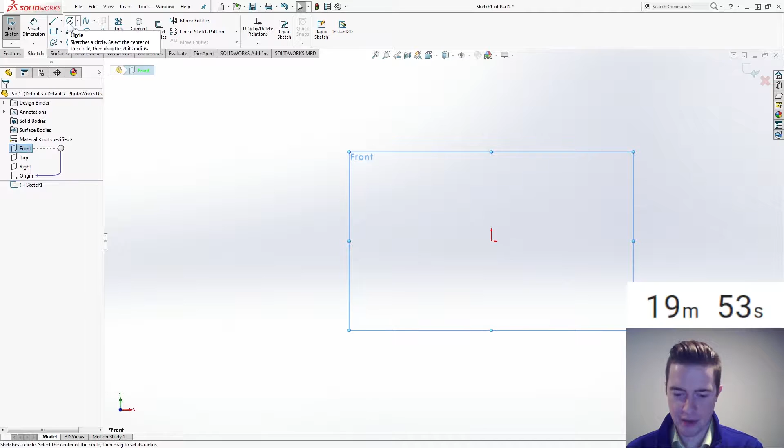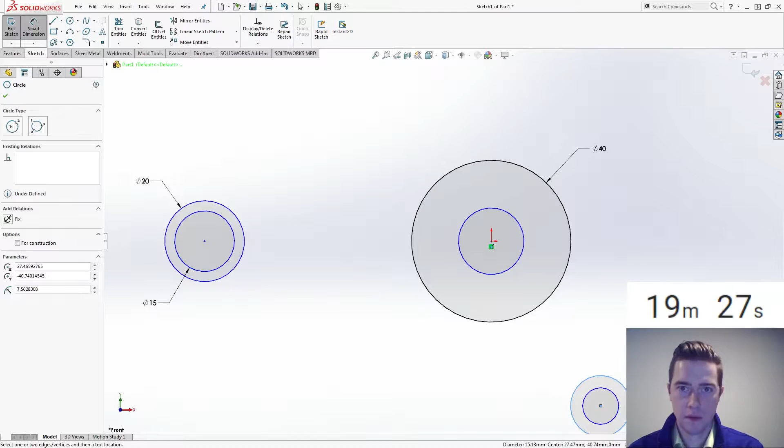So I don't know where I want my origin to be. It doesn't matter too much, let's just put it there. We've got one horizontal there and there. With some of these sizes here, 40, we can draw out a couple more. It's 20. That's horizontal. We have vertical—no, we do have a position there.

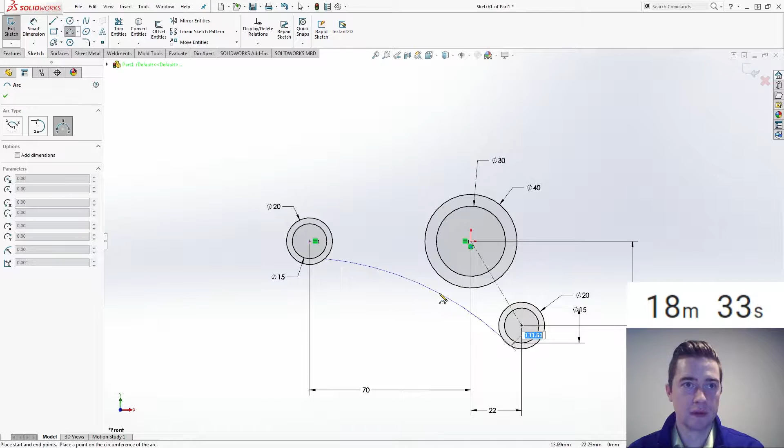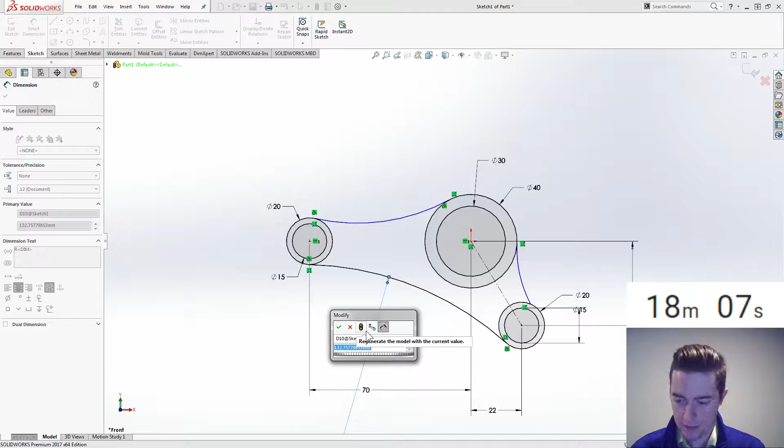So from there, let's sketch some of these out. Yeah, I can't do tangency like that, but I can do it like this. That pre-selection got me there. Oops, and we don't have tangency here.

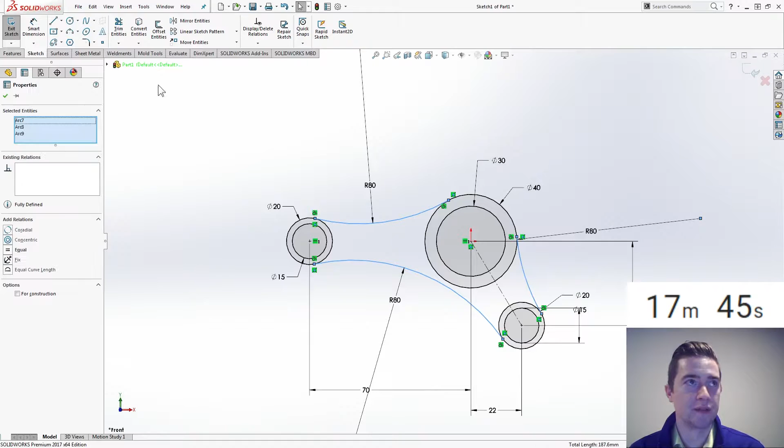Let's see, I also want to see what I can do with offsetting these here. 3. Yeah, it seems some of these aren't doing the direction that I want. We'll just do that. Offset entities, reverse direction.

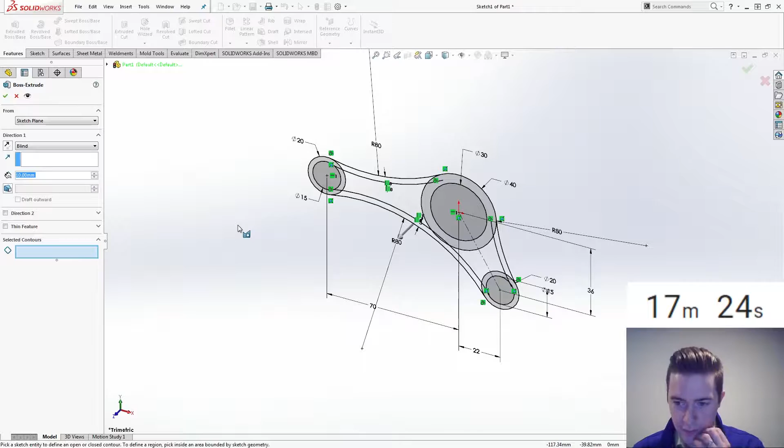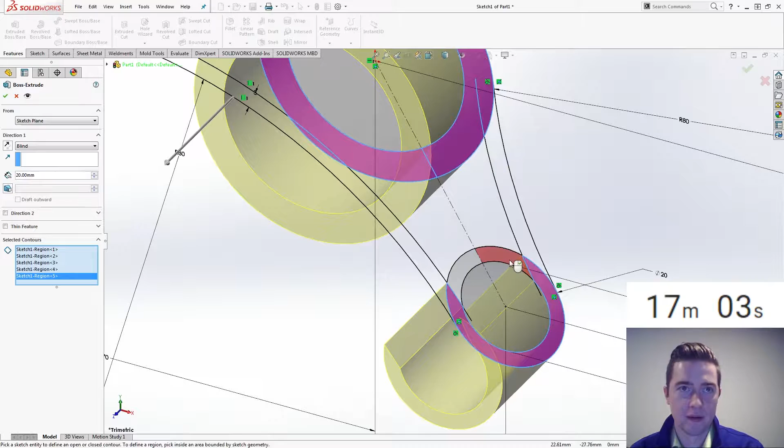And with that, let's boss extrude. So what do I want to do? Let's just start with this primary cylinder, and there's that small section down there. That is coming up 20. I think they're all coming up 20, right? Let's actually just grab all of those—yeah, they all are. I don't think I want to do mid-plane here, so let's stay away from that for now.

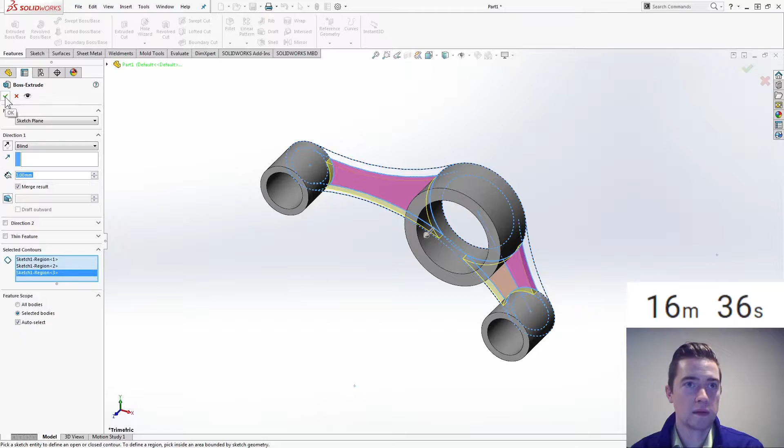Now we can do this a couple ways, right? So what's the thickness there? 3? And we'll do these outside regions at 12. So I think that does it.

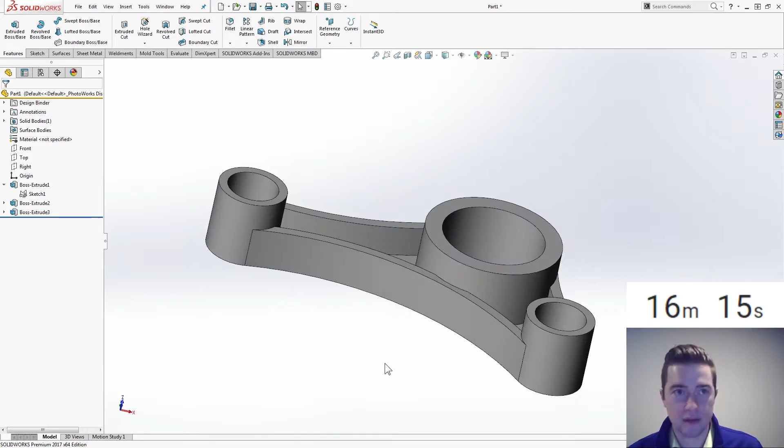Let's apply our fillets, which are 1.5 there and there. We also have them here on these faces.

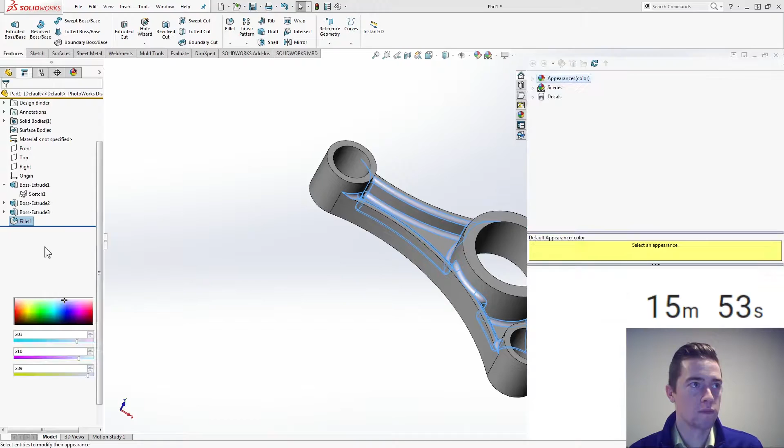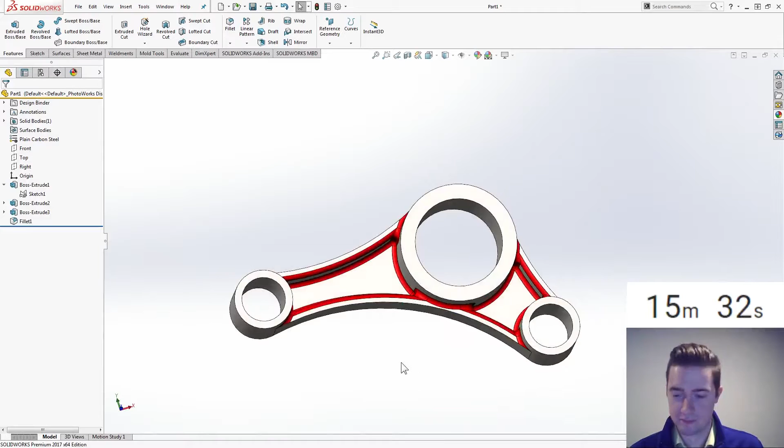Oh, you know what I did? I forgot the material, but I remembered now—plain carbon steel. So I think that's really good. Our time, okay, 4.5 minutes.

So let's switch over to Phase 2. We're going to apply a load here on that one. We're going to fix the inside cylindrical face, with a vertical load coming down. Okay, yeah, so here's where things get tricky.

Essentially these bosses have moved, and same thing with the webbing, so we've got to do a little bit of math in our head. I remember just sitting there thinking, oh my gosh, what am I going to do? And I just plugged in numbers and got it.

What's not called out here—blue dimensions represent changes. Is that right? So it's just that the bottom one was offset? That's 20. From where? Ah, so that one's offset 4, that's 8. Okay.

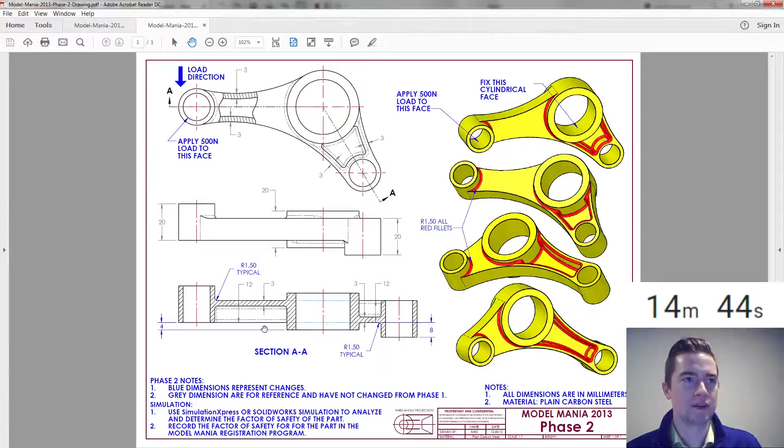Alright, where do we want to start? Let's see, we're going to start with our bosses here, so let's just roll back. Oh yeah, I was using move body earlier—I've used move body before because we could do a little bit of translation there. So translate, rotate. This one is going down 4 in the Z. Reverse.

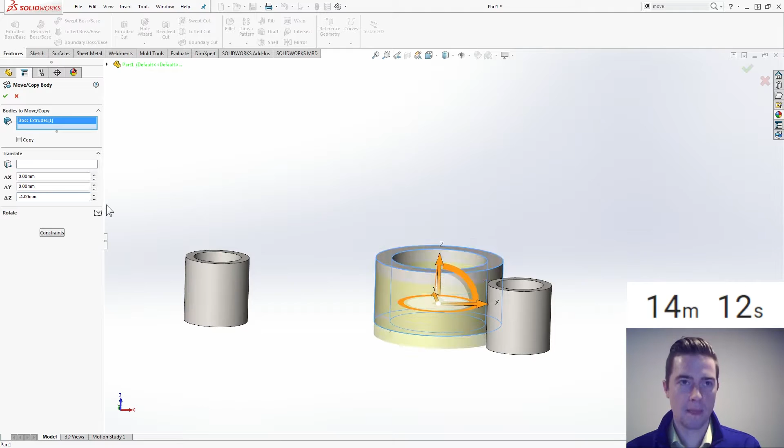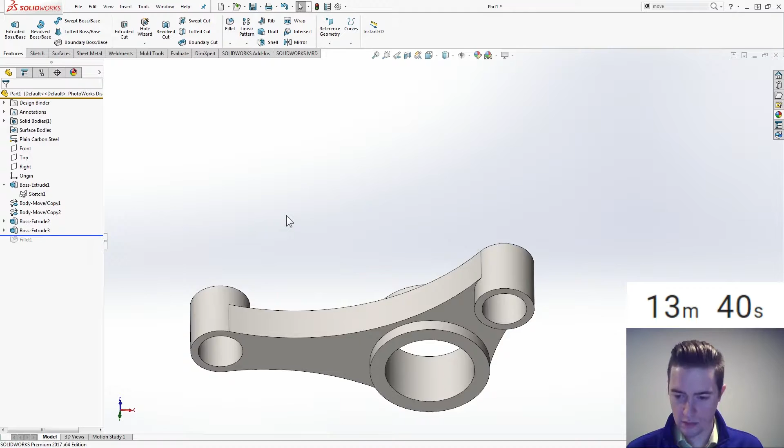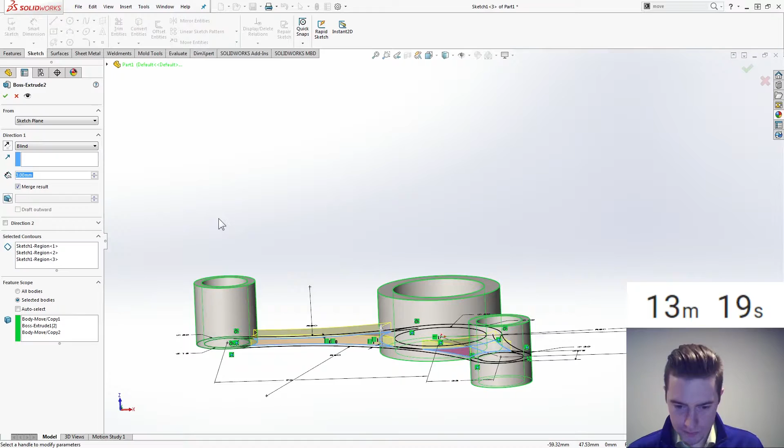Let's see, move again—that body is going in the Z, 8. Negative 8. But that doesn't seem right. That's 12 from the top, going down.

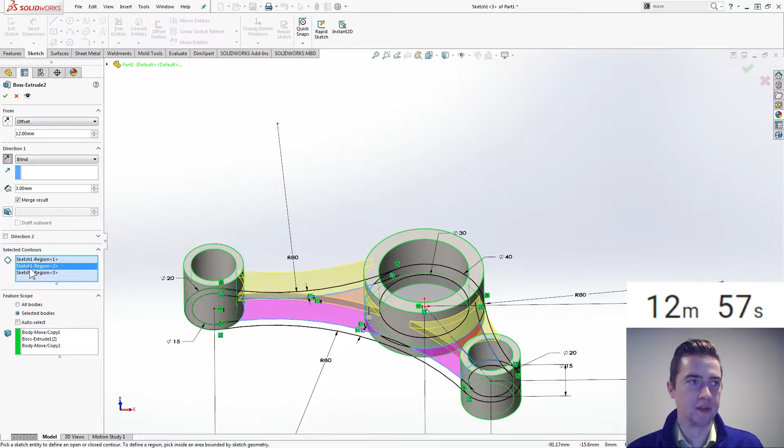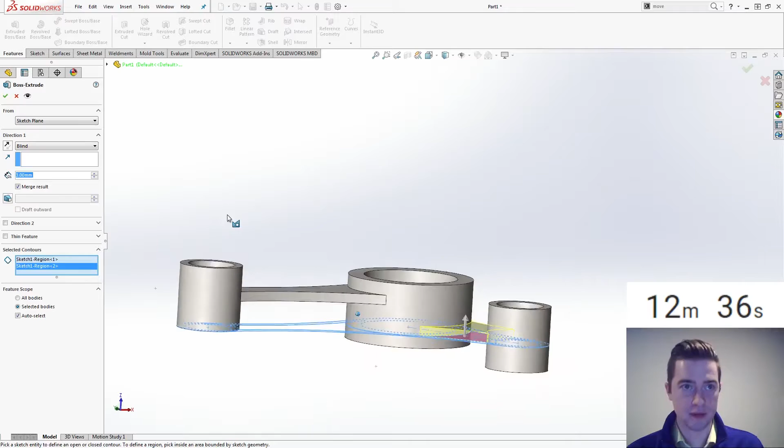So let's deselect that pro region there. I think that's the right dimension—it's offset from the top, 12, going down, yep. And that one is right there.

So we then have these webs which appear to be the same—going down from there, going up from there. Yep. Alright, so then we just have to worry about fillets.

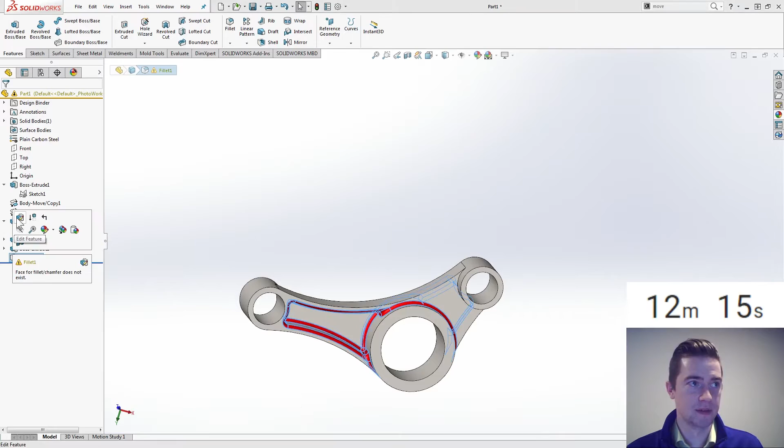Fillets are tricky on this one. We're missing a face now, but let's just kind of see what we can do. Ah, and I know one of my coworkers mentioned this—there's this fillet back there that he missed. Oh, there's one right there too.

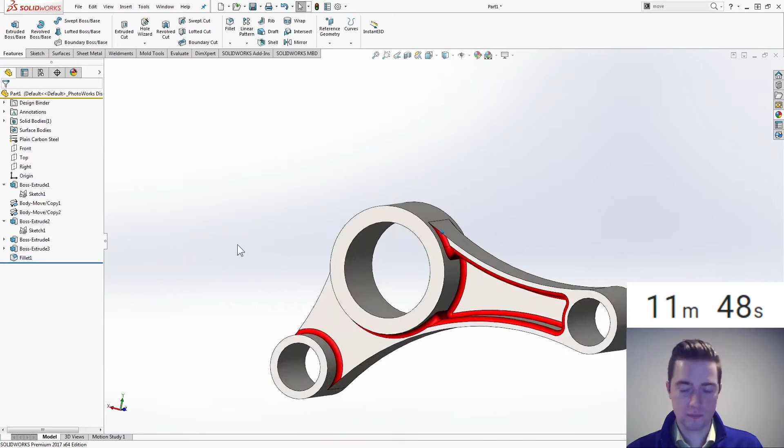So that side is looking good. Flip it over. I have it like this in the drawing. That's looking good.

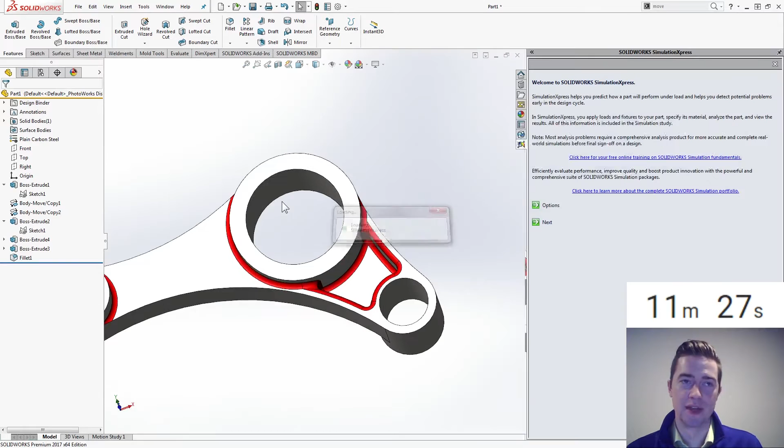Alright, let's get into SimulationXpress. What I didn't use much was the S key—I'm out of habit with that one. Add a fixture, we're fixing that hole.

Add force to there, selected direction. Top at 500. Down.

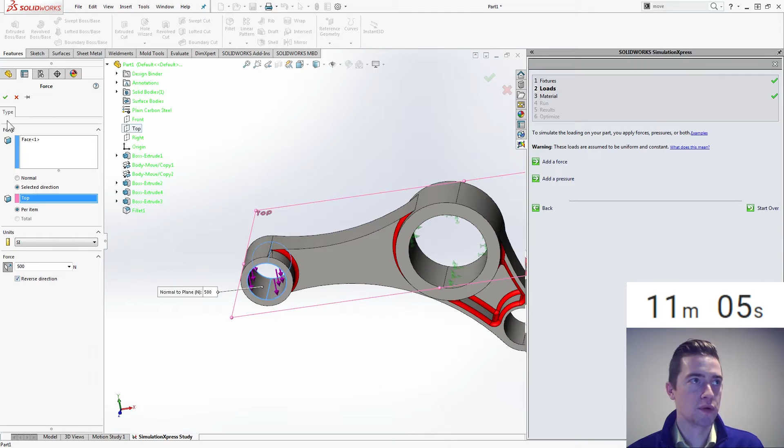Solving off screen. And we just need the factor of safety that we're going to put in. So, yes, factor of safety 2.98. Enter 2.98. Stop the timer.

Awesome. Wow. Wow, okay.

How could I have done that faster? Could have tried to use the S key to go faster there. I mean, I stayed away from trimming—we used contour selection. Maybe I thought about it too much. Was I talking too much? I don't think so.